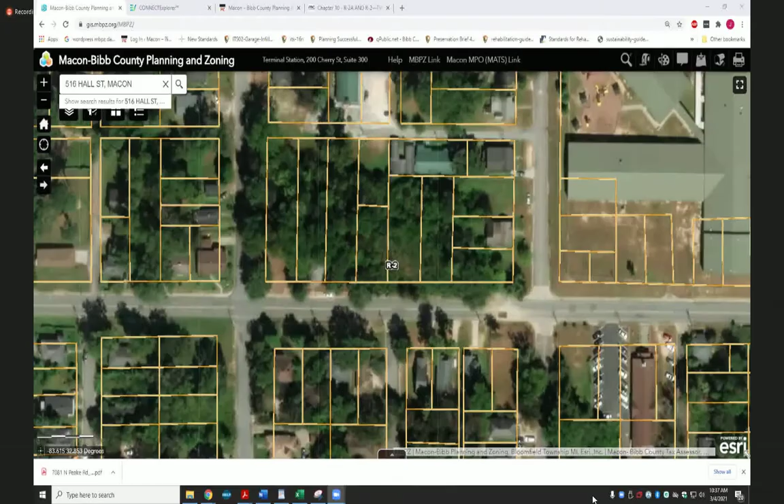What's the address there? This one is at 516, so we've got a couple. We've got 516 Hall Street, we've got 536 Hall Street, and then we're going to be looking at 1136 Bailey, 1180 Bailey, and we're going to look at 825 Woolfolk as well.

So this is the 516 Hall here, and this is the 536 Hall.

From a zoning perspective, duplexes are allowed, provided that the lot area is done. I know we don't have any, I don't think we have any site plans. Give me just a second, let me look here. This is the Sunrise development that we had.

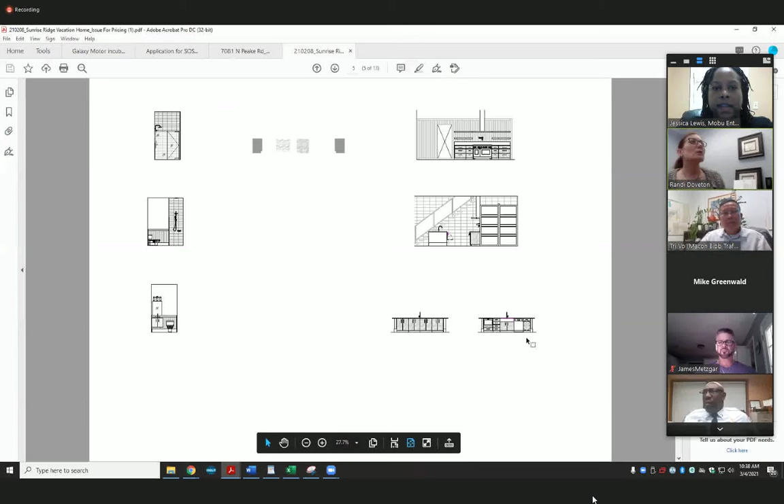Okay, I did not see that one. Give me just a second and let me look for it really quick. I did not see that one when I was doing it. Did it come from info, like the others did? Okay.

Let's see, on the 22nd is this one. Oh, excuse me, yeah, it's the 24th. And then on the description, here we go. I did not, that one got lost in translation. Okay, I'm downloading these and putting them so that we can look at each of them, okay?

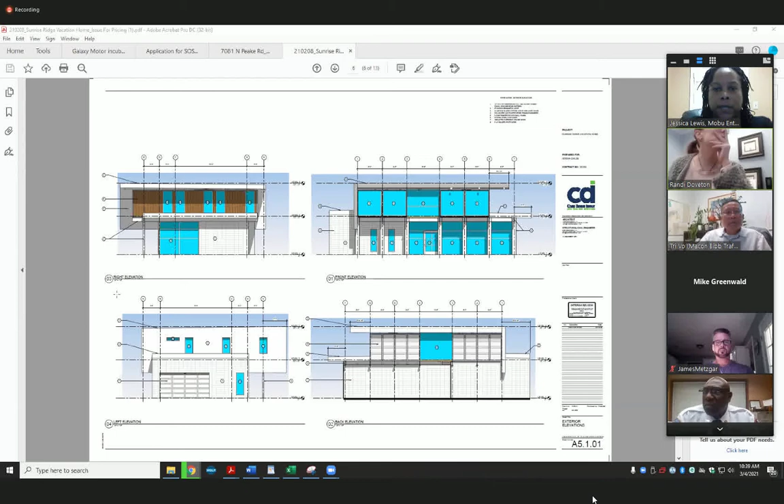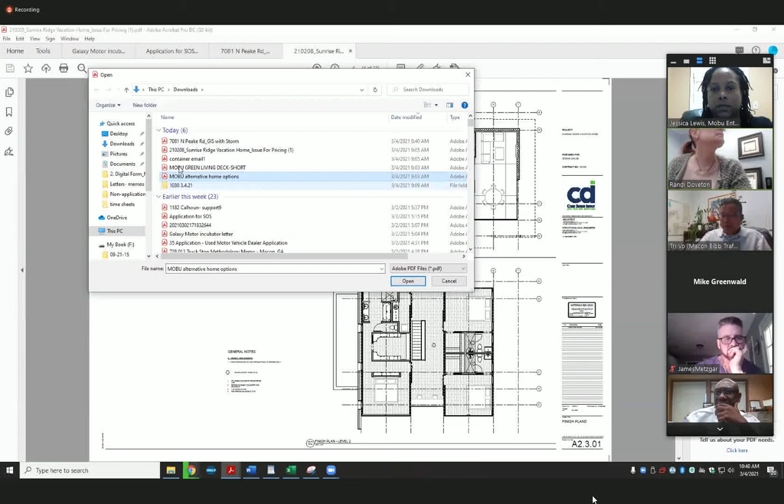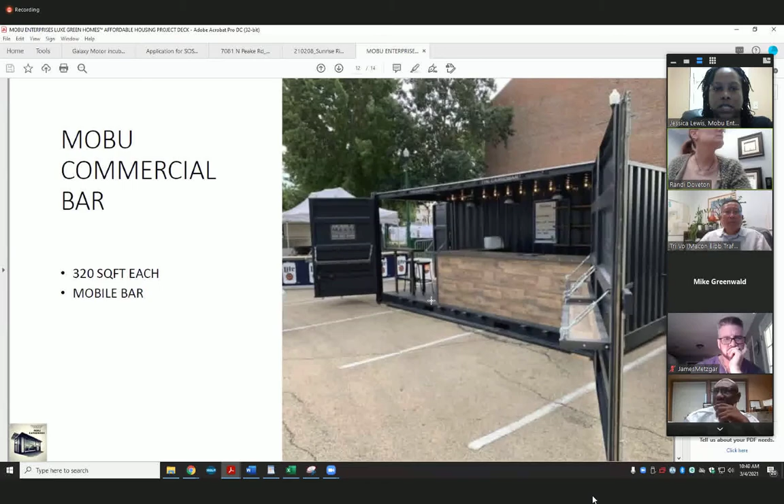It is in the process of downloading. I do apologize for the delay. I said when I was looking at it, you had some really interesting stuff in here. Right, and they're coming up now. It took a minute for them to load for my computer, and I do apologize for that.

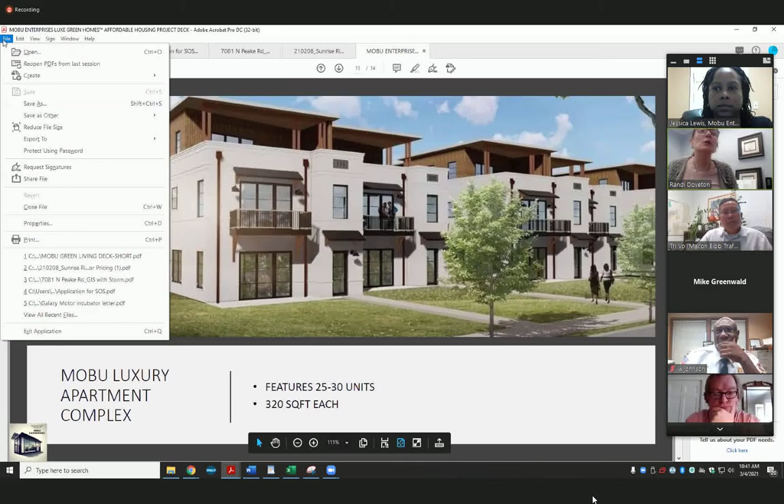I think one of those failed to download for me. I'm trying to download it again. I think the 516 should be up.

Yeah, they're unconfirmed right now. They're in the process. Yeah, I do apologize.

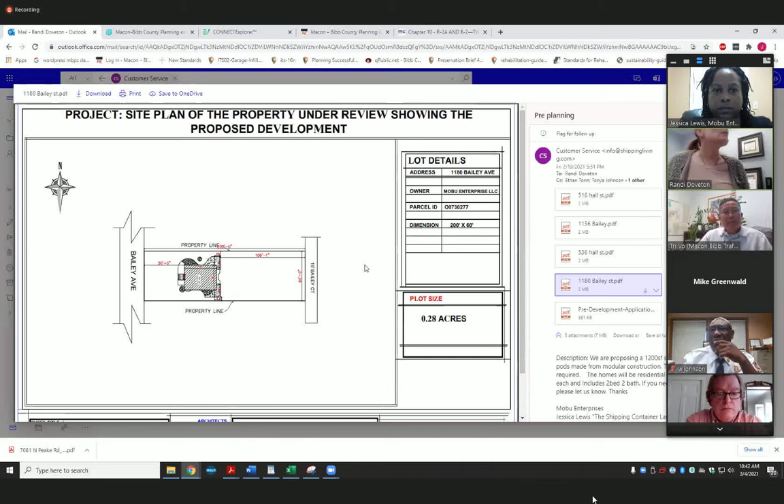Wait, what I could do is drag my email over. We can do it that way. There's more than one way to get around something. So until they finish downloading and I actually open the PDF entirely, you can look at them this way.

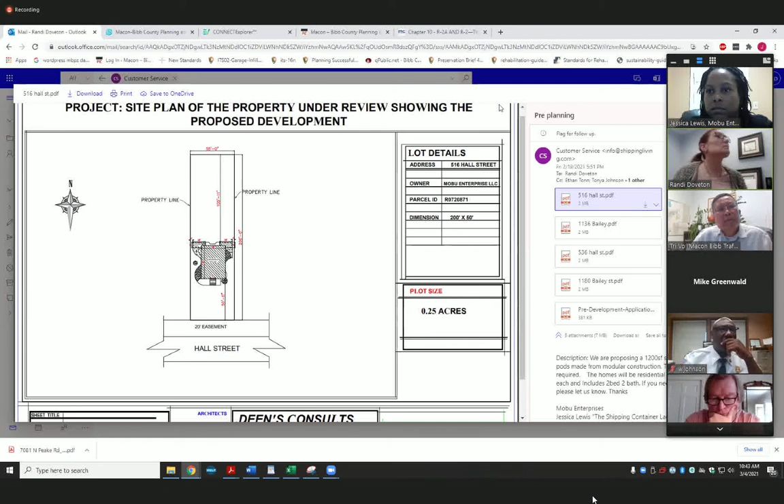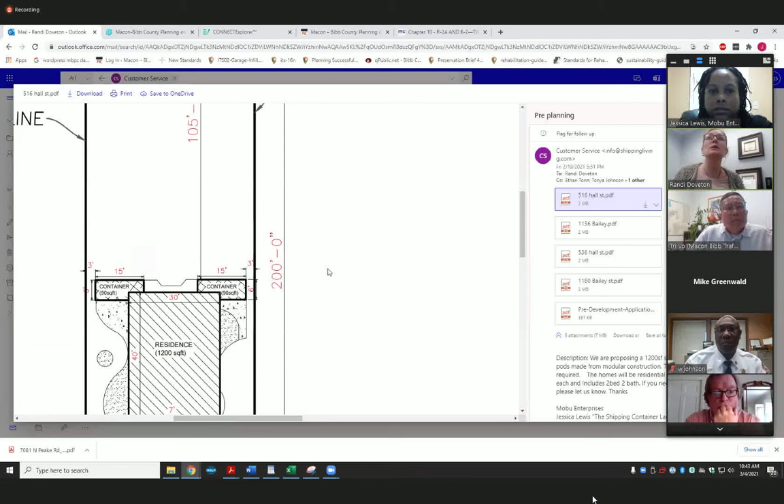Regulations and stuff, yeah, okay. So from a zoning perspective, we'll look at the codes in a few minutes, but we probably need to look at the availability of water and sewer, fire stuff, traffic, as well as the building code department. Algernon, do you want to jump in?

Is he on? I'm here. Okay, you want- sorry, I was unmuting, and so I was frantically trying to look at our GIS map to see what's available.

These are old established neighborhoods, as was mentioned. So there are water and sewer infrastructure available to at least Hall Street, also Bailey Avenue. One of the main issues we're going to run into is trying to find the old sanitary sewer lateral that used to exist, if there normally was an older home that was probably demolished at this point.

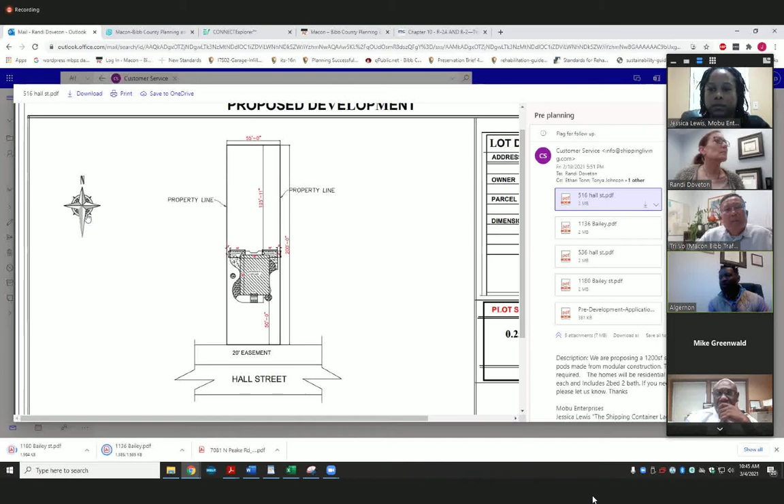Ideally what you would do is we'll try to research and figure out what information we have in terms of the old records of the location of the lateral, maybe the distance from the manhole. That way you can find that lateral on the property and tie back into it. That's to avoid making another sanitary sewer tap connection to the main in the street.

That's just additional cost that you would incur if you have to go into the street, because most of these mains in these old neighborhoods are under the pavement. So you have to employ a licensed plumber to cut into the asphalt and dig down to the sewer main, make the tap connection, which requires an inspection also, and then repatching based on the standards of Bibb County Engineering Department for the right of way.

But hopefully, if we're lucky enough, we can find the old stub outs. They may be buried, but at least we'll do what we can to research our records to see if we can find the distances. At least you'll know where to start digging.

These projects won't incur a sanitary sewer tap fee since they were old established homes previously. You just need to make the connection and pay your contractor or plumber to do what has to be done.

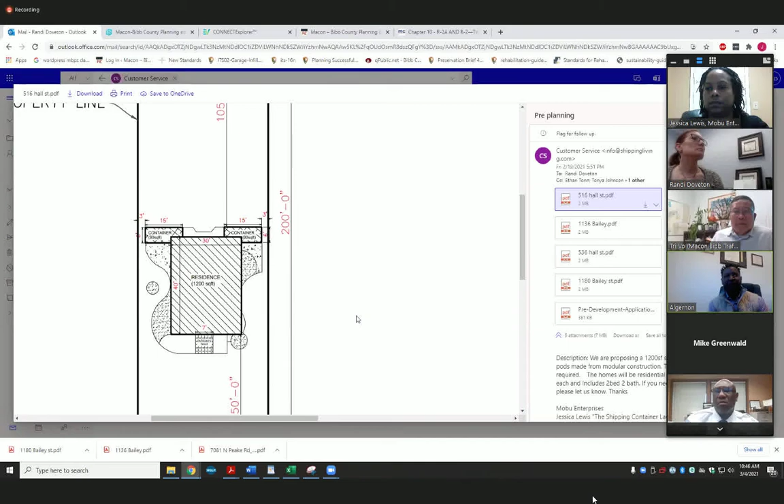We have no requirements in terms of plan review fee. Sounds like with some of the footprints of these smaller lots, you won't add more than 5,000 square feet of impervious - that's the threshold. If you add more than 5,000 square feet of impervious, then you get into managing the stormwater on site, and you have to actually have a plan by a design professional to manage that stormwater.

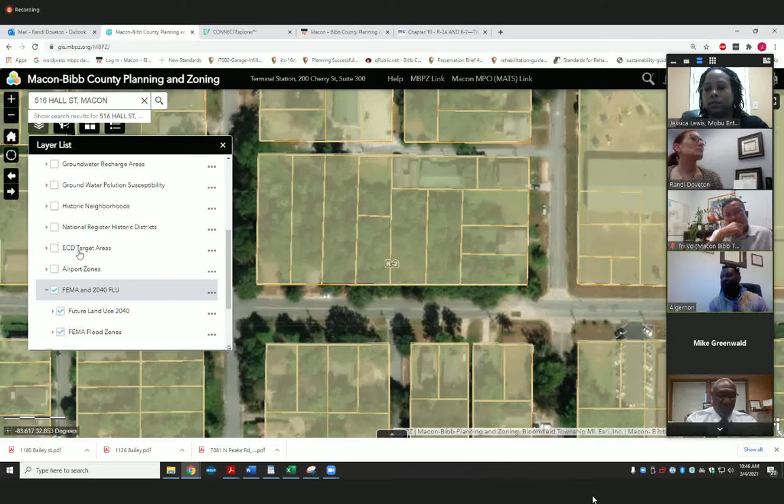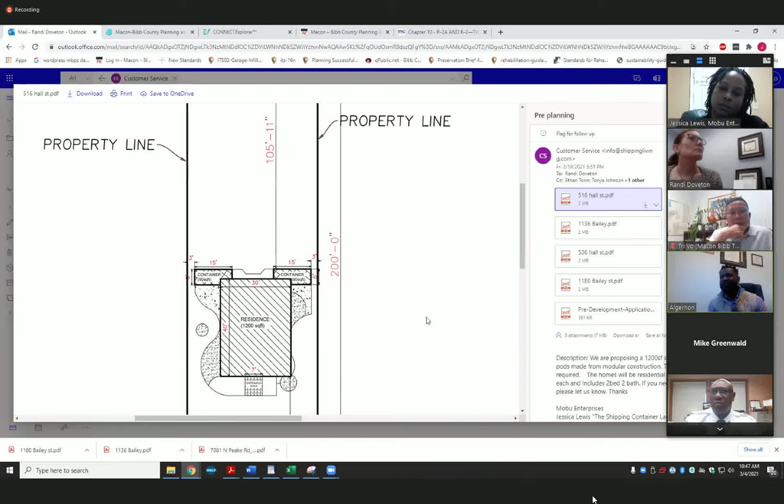And you would just follow best management practices in regards to erosion control. So if there's any land disturbance, which of course is going to be less than an acre, you may just have to have some silt fence or protect some inlets for stormwater, rainwater close to the site. I am showing there are some private storm drain pipes on the backside of the properties.

Probably a good idea to inventory that infrastructure, take a look at the condition of it, because you don't want any drainage problems on your property. You've got a nice new duplex home there, and in the back of the yard it's flooding out because the pipe infrastructure is caved in or what have you.

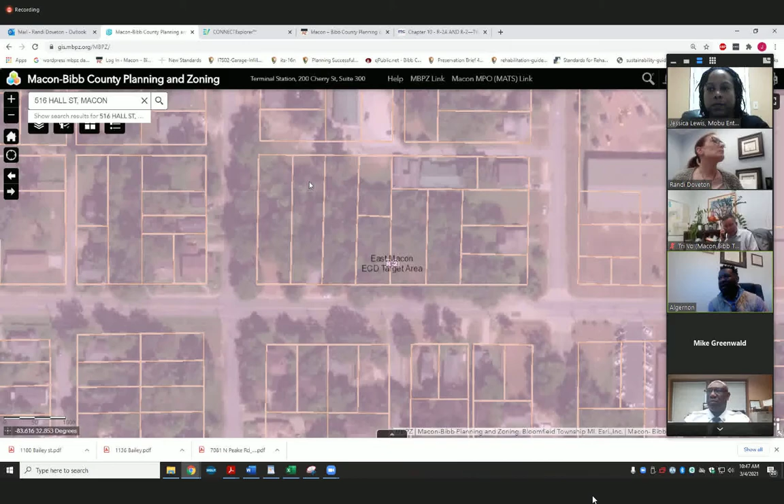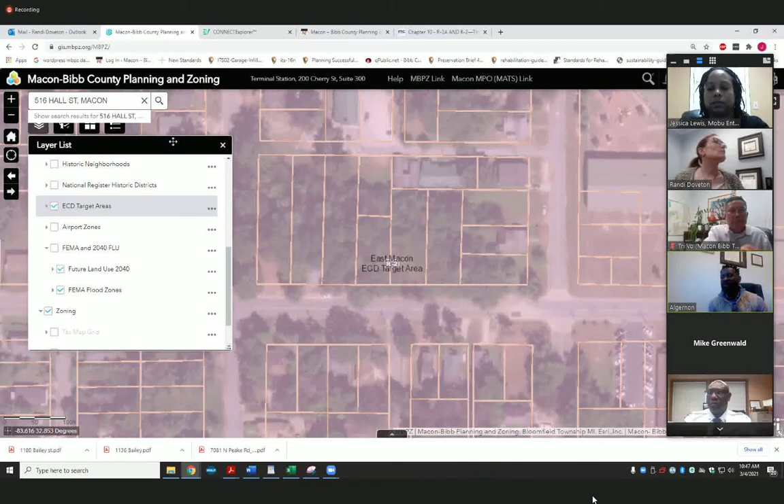That's more than likely private infrastructure. So those pipes are pretty old. Probably need to take a look at them and see if they're properly draining the rainwater off site.

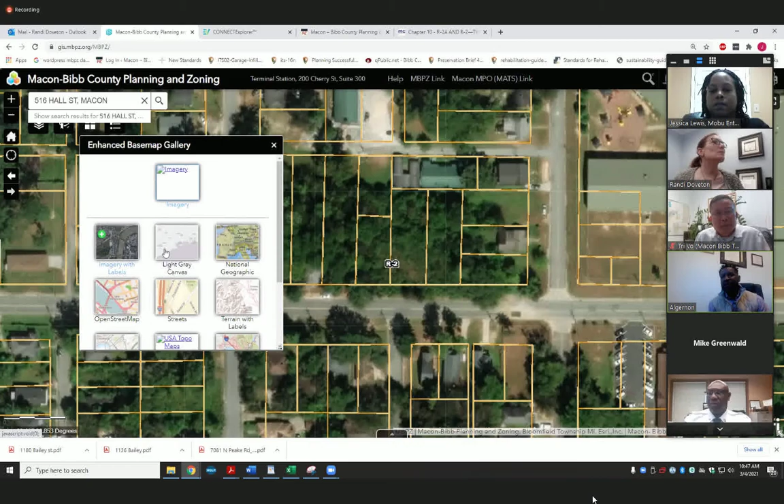So there really isn't much you would have to do with us in terms of the Macon Water Authority.

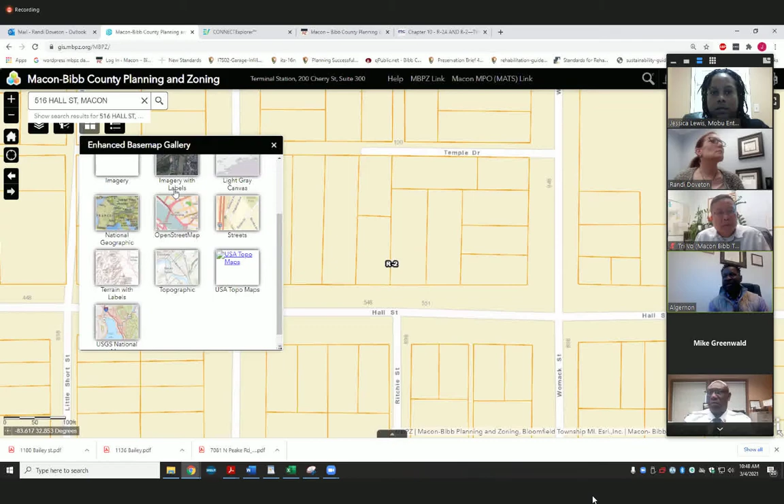A lot of the old water meter services are probably terminated or disconnected at this point. So we just have to take a look at each individual lot and have our water distribution department or meter reading department go out and assess what's required for each location.

Some of the old boxes may have been pulled out, copper service is buried, and we'll have to do a cost estimate specific for each lot to see what's required to restore that meter service and get a new box for that lot. We won't know that until you're ready to move forward and ask for that information.

Then we'll start doing the research in the field to figure out the cost required to restore that service. If we can't find the old service, or it's been totally decommissioned, we'll have to do a new tapping set from the water main.

We do know those standard costs. The 5/8 inch meter is a standard $1,290 for each meter service. For a duplex, if you want them separately metered, that means $1,290 for each meter for both units.

Once you get into larger projects with 3 or more units, that's another threshold. 3 or more units, you're required to comply with our backflow prevention program. Behind those water meters, you have to have a backflow device, a reduced pressure zone (RPZ) backflow device, installed behind the water meter, if that one unit feeds 3 or more altogether.

If you have 3 separate meters, that throws it out of that ball game altogether. But if one water service feeds 3 or more units, then you have to comply with the backflow prevention program, have one installed, and have it tested annually to stay in compliance.

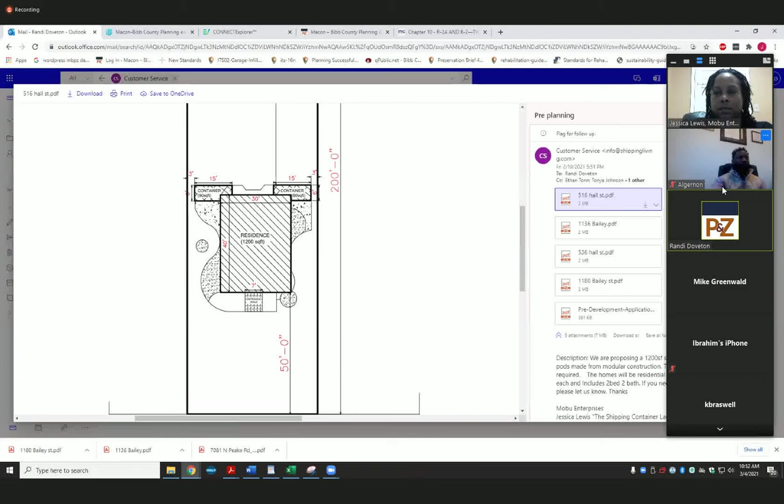Randi, I'll be glad to look into Temple Drive and get back with you later on that and any of those other adjoining properties.

So from a zoning perspective, Hall Street's going to be a little bit - 516 Hall is going to be a little bit more complicated than some of the others probably.

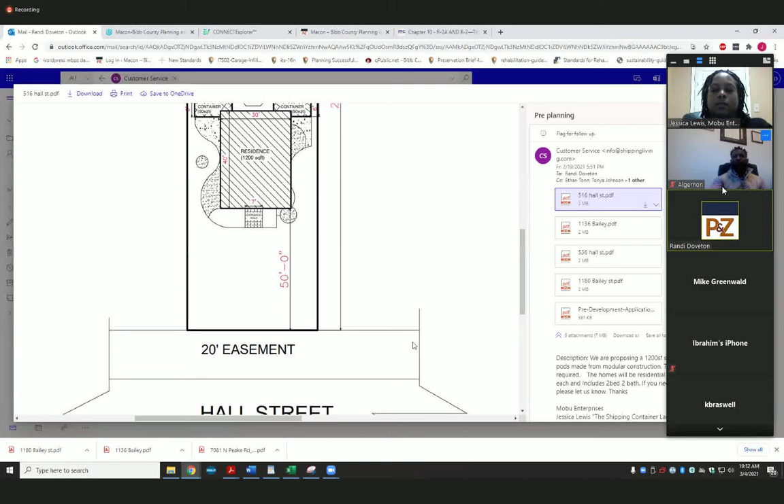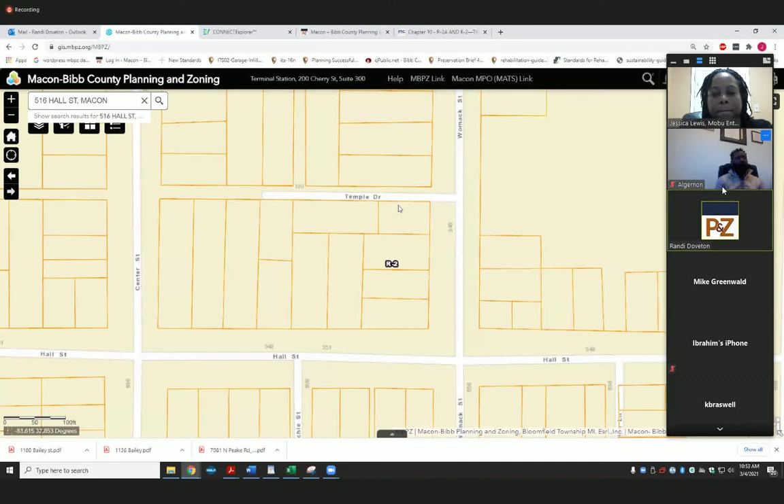This property line is also a right-of-way line. This is the right-of-way to that little alley street to the rear, and then you've got a right-of-way here. Let me get over to the map. So you're looking at Center Street here - this is 516. You're looking at Center Street, Hall Street, and then even though it may not go all the way down, you've got a right-of-way for Temple Drive back there.

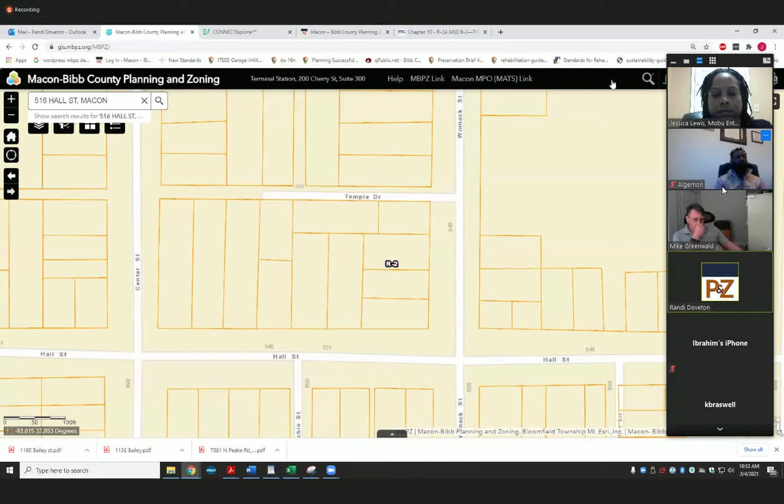From a zoning perspective - screen here, just a sec, trying to relocate my little bar there so I don't...

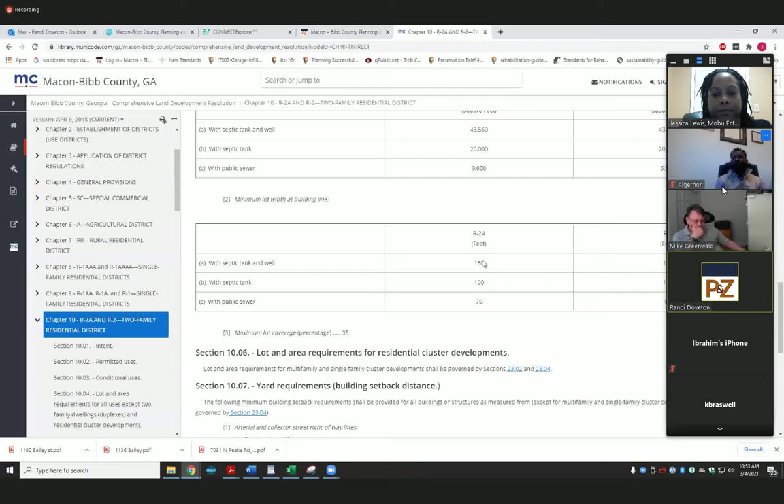There we go. So in an R2 district, you're going to be looking at some setback issues, not from the front, not from the rear, but from your sides. That left side of 516 is a minor right-of-way for Center Street, and it should be 25 feet.

These are such small lots, there's no way to get 25 feet there and actually stick something in. And on the other side, you should have 10 feet. So you're showing 3 feet and 3 feet.

This one, from a zoning perspective, doesn't cause me that much heartburn. This one maybe does - I'm going to defer to Jim on some things with that.

But you're also going to have, because of this, the distance to the street, you're going to have some stuff with building codes that James Metzger will jump in on. But from a zoning perspective, this is in the East Macon ECD target area, and that does give us some greater leniency on certain things.

Based on, these are existing lots of record. They're smaller, anything that goes on them is going to require variances. They would be able to, provided they meet things, other stuff in the neighborhood or historically, we can grant, we can be more lenient on setbacks and other things than we can on lots that might be legal lots of record, but are not in the target areas.

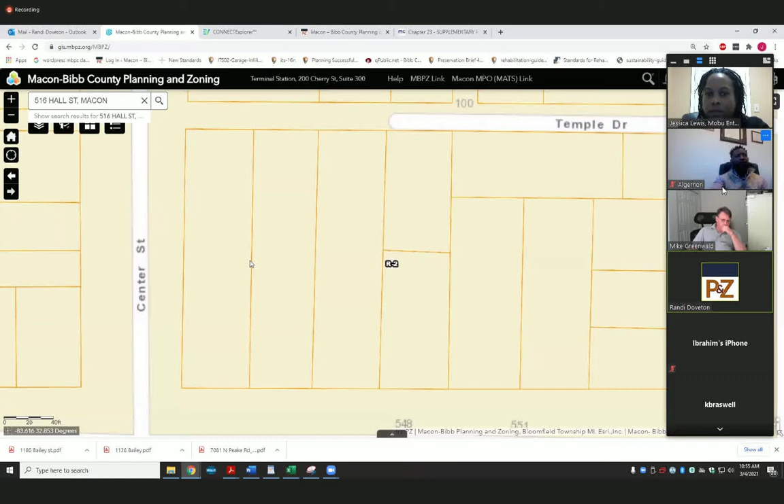Oh, okay. So they're not the actual houses. Okay. So are they connected to the house, or are they more of an accessory like a greenhouse?

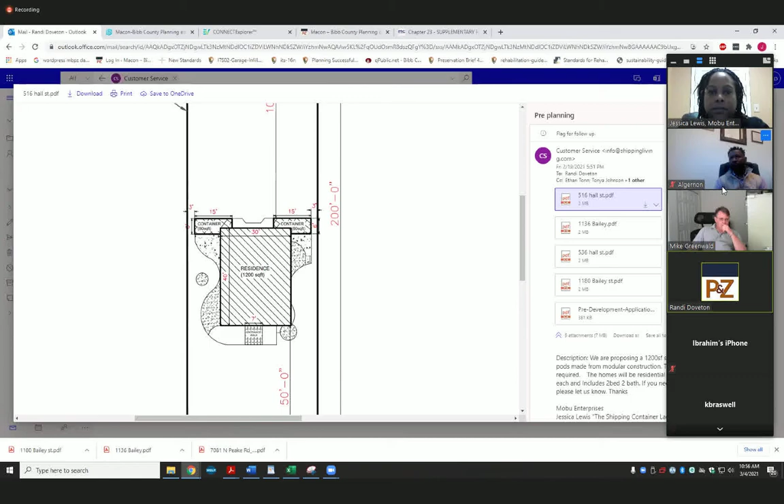Yes, from a zoning perspective, we would consider those accessories. They do need to be 20 feet from the house and 5 feet from a property line, but you could put them somewhere else on the lot too.

Do it as a community garden type.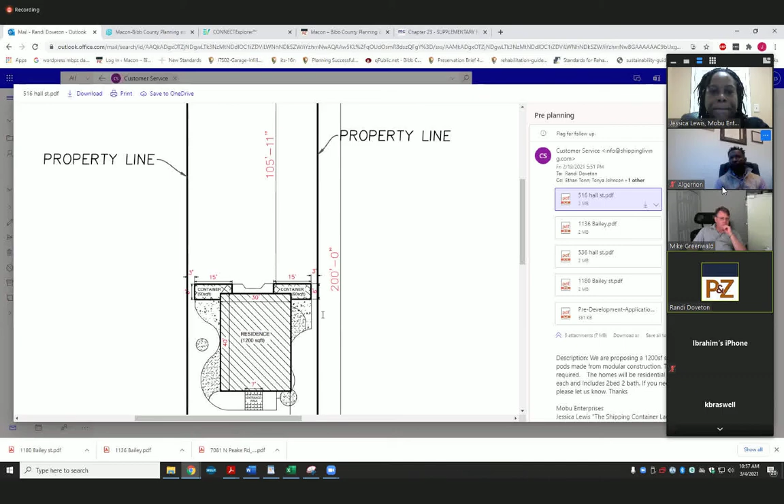Okay. Okay. Okay, so I wasn't sure. I thought maybe they might be some type of part of the house. I was not sure exactly. I saw they said container, but I was not sure exactly what they were.

So in that case, you probably more than meet the 5 feet here then, and probably pretty close to the 25, because if this is 15, maybe 3 to there, you're probably getting close to 15 to 20 total between here and there. We're looking at, what's that? There's a total of 15, but it's inset sum. You've got 3, so just say 12. You're at least 15 feet, it looks like, from Center Street there.

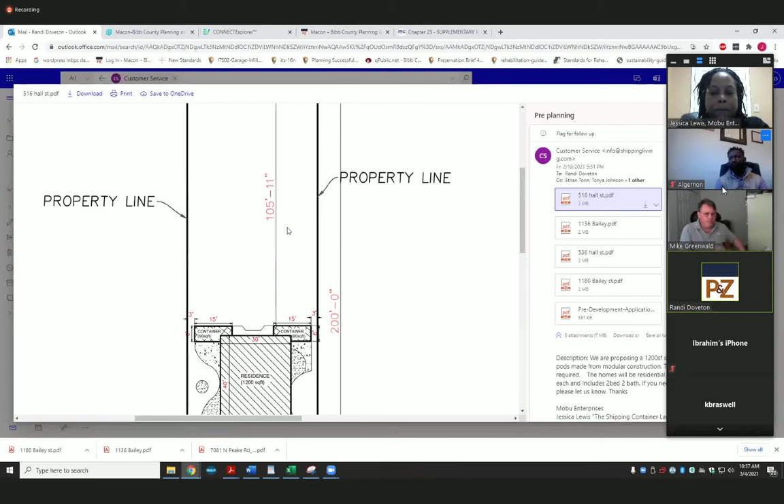So from a zoning perspective, that shouldn't be a problem. It's a permitted use. It's an R2, and we just issue a zoning permit. It's $375 per location. You submit the application, the site plan similar to this, and we issue the zoning permit.

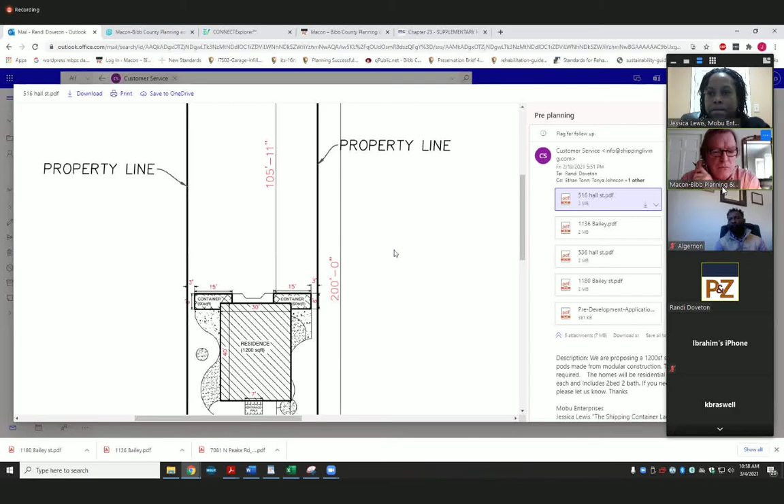Randi, can I ask? I'm confused, surprise. The structure, the residence you're showing here, what type of construction will that be? Is this a modular home? Is it a container, a shipping container that's been reconfigured, or what?

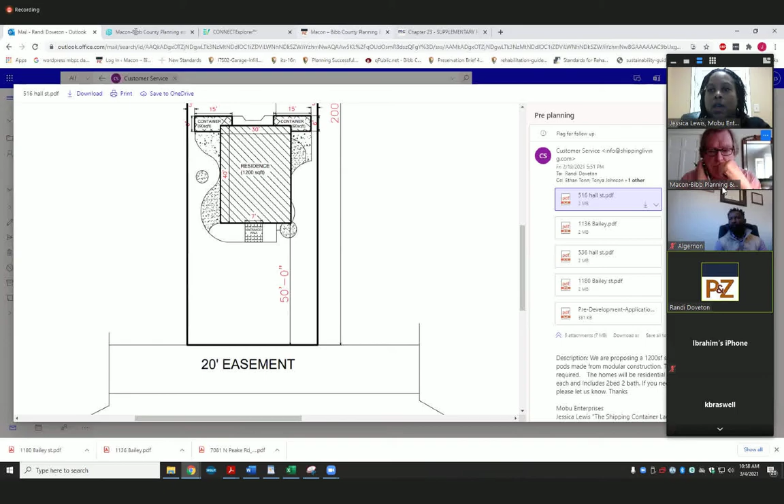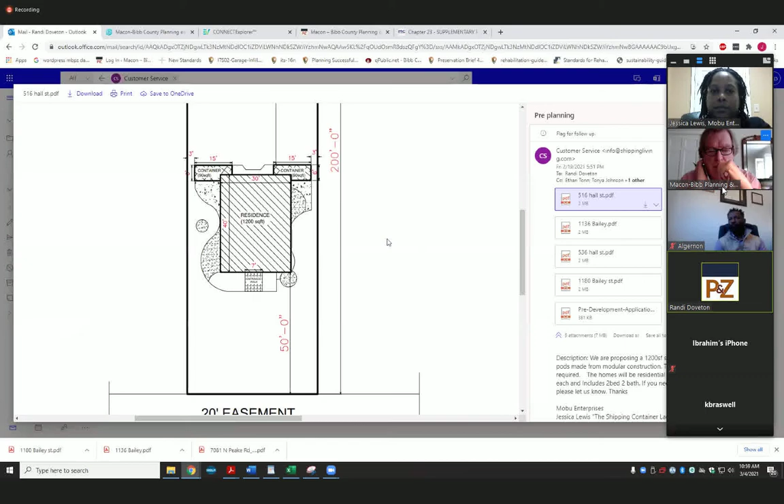Okay. So essentially, it is a modular home, and that it's being built somewhere else and then brought in place with minor stuff done. Okay, so how does the DCA classify this?

So they, okay, they would consider it to be an industrialized home at this point, facility. So that then gets to the point of how the building code department is also going to classify it.

Yeah, let me ask, is that Ms. Lewis? Will that be installed on a permanent site-built foundation? Okay. Okay.

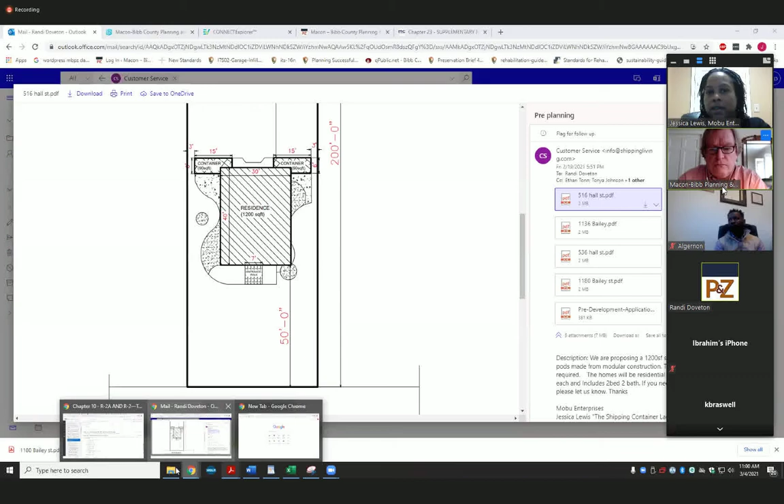Okay, so do we have, Randi, do we have a visual of that unit? I don't know that we have one of that particular unit. I think they were seeking some guidance from us on what type of facade skin they would need to house them in, because they have several different.

Hold on just a minute. Well, quite frankly, we're in kind of uncharted territory here from a zoning standpoint. So it's, this is also one, they can put any type of facade on it and wrap it.

Okay, so I mean, which of these we're seeing would be that unit we were just looking at on Hall Street? I'm thinking probably.

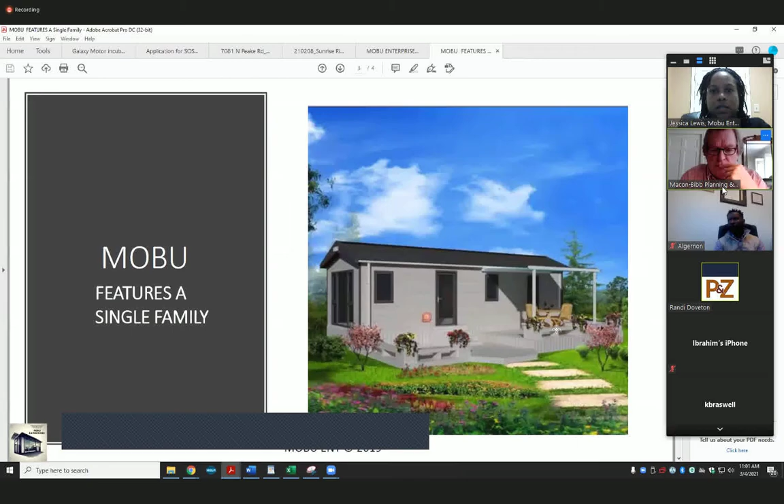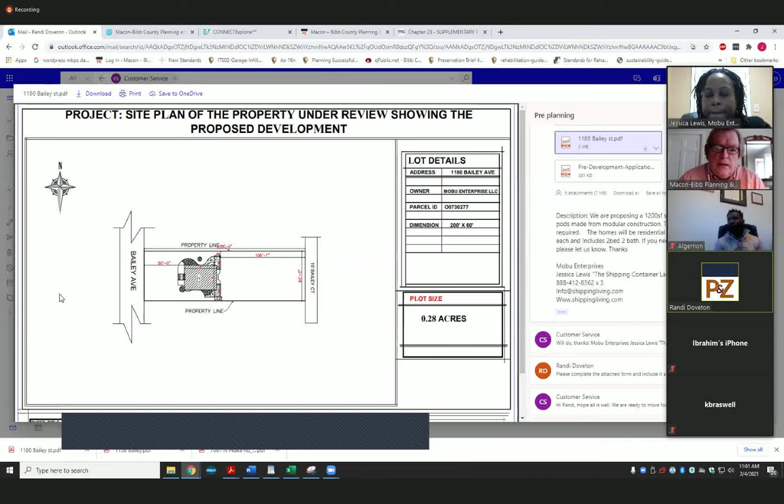I don't think any of these sites are in a historic zoning district, so there's less concern about the exterior appearance from a regulatory standpoint. Of course, a commission would want it to fit in with the existing areas as best it can.

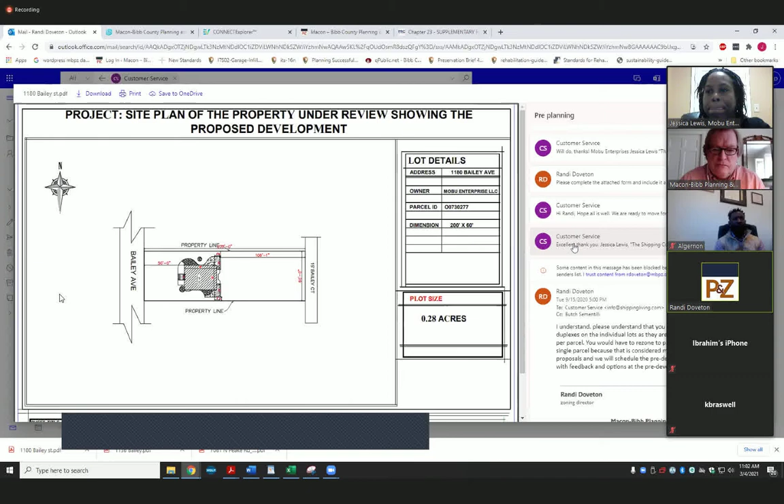But the more important issue is how that structure is classified. If it's classified as a manufactured home, then that's a problem. I was considering that they were going to be assembled on site, or that it was already classified as an industrialized dwelling, because from a zoning perspective, if it's built on site, then it's not a manufactured home.

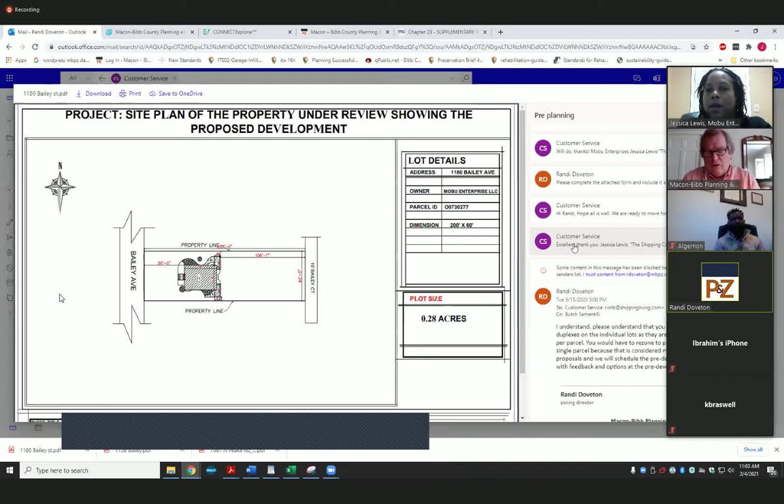Or if it's industrialized, even though it's built in a factory, it's a DCA industrialized house, we treat those no differently than we do a site-built home. We definitely need to hear from Jim Metzgar, but it's going to be kind of critical how DCA classifies this type of structure.

Okay, so there we go.

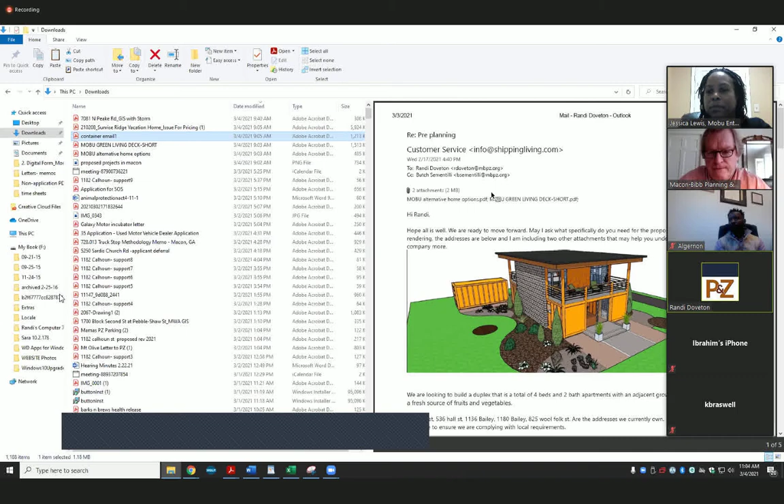I'm not sure that it's built on site, it's really about what building codes apply or don't apply. Even if you're built on site, the local building codes have to apply. So that's something Jim will have to address.

If you get a DCA certification, then it's like an industrialized building that's built off site and brought to the site, then that's fine too from a zoning standpoint. But what I'm hearing you say is that this is in the works and you won't know for a while how they're going to handle these. Is that correct? Okay, Jim Metzgar, are you there?

Yes, hi, my name is Jim Metzgar. I'm the plans examiner here at Macon, Bibb County.

So modulars are fine. Normally when they're at the plant, they get inspected at the plant in accordance with whatever year and edition it is. That certificate will come with that modular unit. Once it's brought on site and set, we will do all the inspections for the connections, the sewer, the electrical, the plumbing.

What if they're not building it in a plant? What if they're planning to build it on site? How would you treat it and inspect it at that point, Jim? Well, then it would just be a set of plans that would be submitted to the office, and we would do the regular inspections for any single family dwelling or duplex like we normally do.

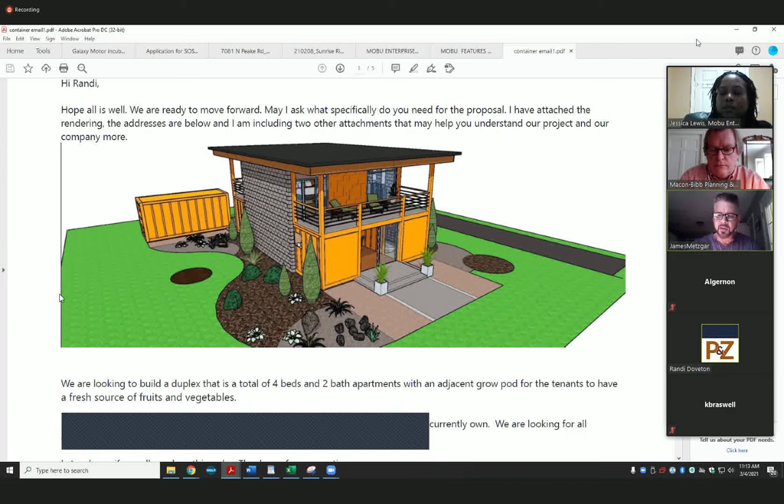The other thing we do here is you can always schedule a pre-submittal meeting with the building and fire department. We hold these on Tuesdays and Thursdays. You could email us or call, and right before you're ready to submit, we can iron some things out and take a look at your preliminary plan. It's great to have these meetings, we iron out a lot of issues prior to submission so the review process is a lot smoother.

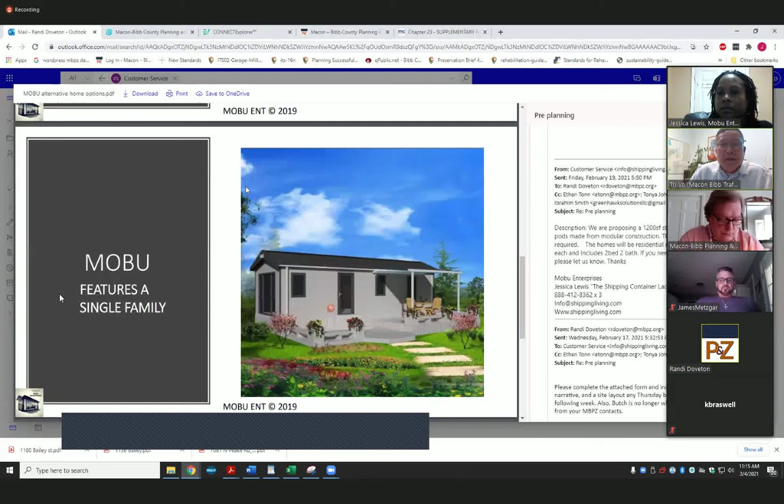Yeah, I'll jump in. This is Tri Vo with Macon Bibb Traffic Engineering. On one of the site plans, it doesn't show any driveway or so on. Each property requires adequate off-street parking, so make sure you put that in mind. Back on the site plan, it's showing that I don't see any driveway or garage on three lots.

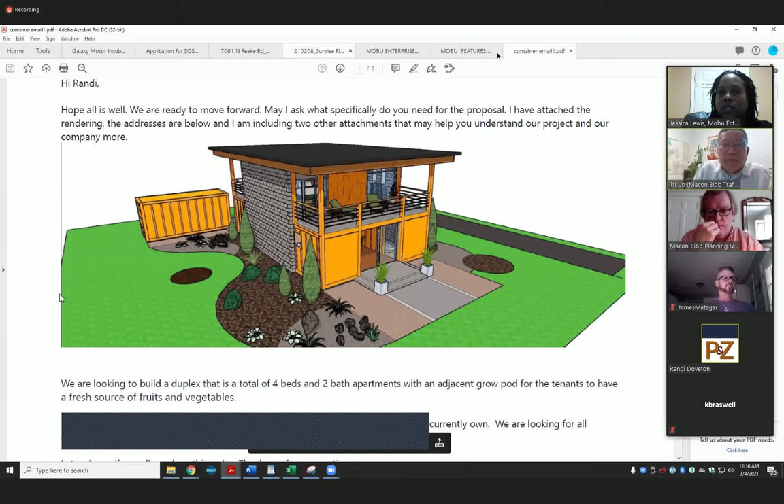That's something that the zoning handles. I don't think so, I mean every single family or duplex that we do has got to have room for basically two parking spaces, so you won't have to get special approval from traffic engineering for that, but that's something we would require just by code. That's all I have.

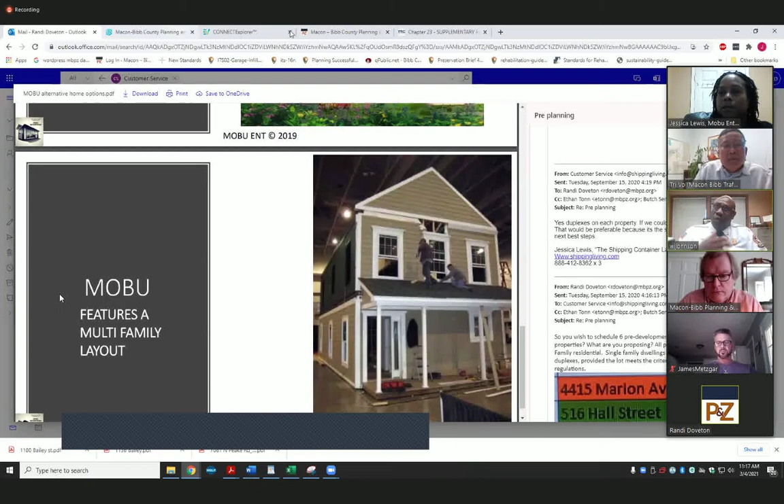Okay, Willie. From a fire side, for most single family dwellings we don't normally get involved, but since these are going to be containers, you're going to wind up dressing it up and putting other kinds of coverings over it. For us, we just need to make sure we know when y'all do them and what you've got, because our firefighter operation will be different now. It's not wood frame behind there, you've got a metal building behind whatever you have on the front. So for us, we just need notification and documentation of exactly what you have, and we'll probably come on site to see each one as you do them.

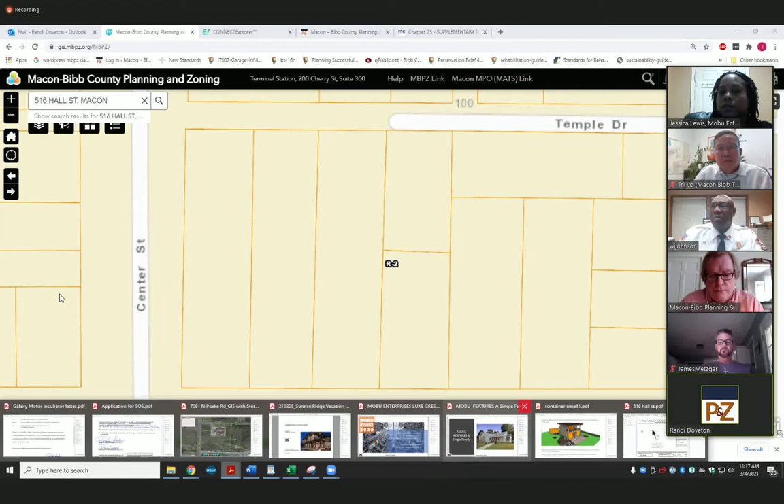And looking at these, I had originally thought they were only going to have 3 feet, but just to be safe, what are you guys going to require for setbacks from your interior property lines? Not from the zoning code, but from a building code, what are you looking at? Their fire separation distance from the property line is just going to be based off the table. If it's within that 5 feet, then they will need a 1 hour rating, but it'll just be based off that table, whatever their fire separation distance will be.

Okay, I'm going to pull up the one for 536. I think I'm going to have to do that from my email. Give me just a moment.

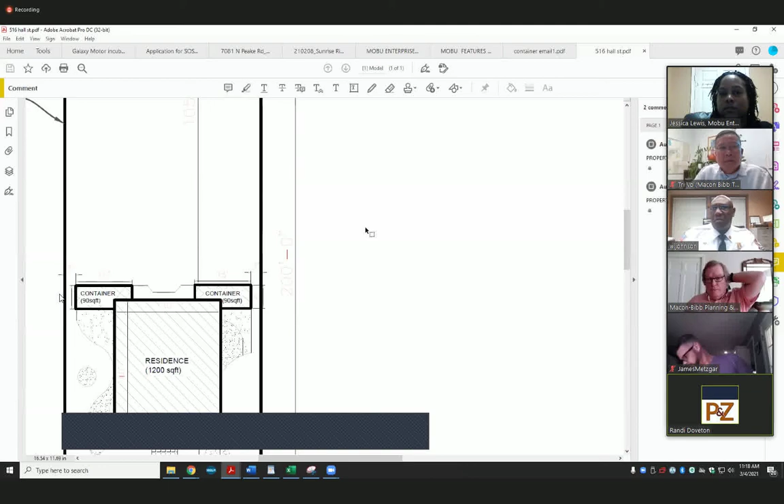Hey Randi, this is Keith again. While you're pulling that up, I've been doing some research. The street you referred to as Temple Drive, it's a 20-foot private alley.

Let's see, I've got to get back to the right. I've got so many windows open I'm not sure which one's which, guys. Give me just a second here. And you did say that we were your first ones here in Macon. We're the first ones with this project. Enjoy. Wow.

Okay. Okay. Okay. Okay.

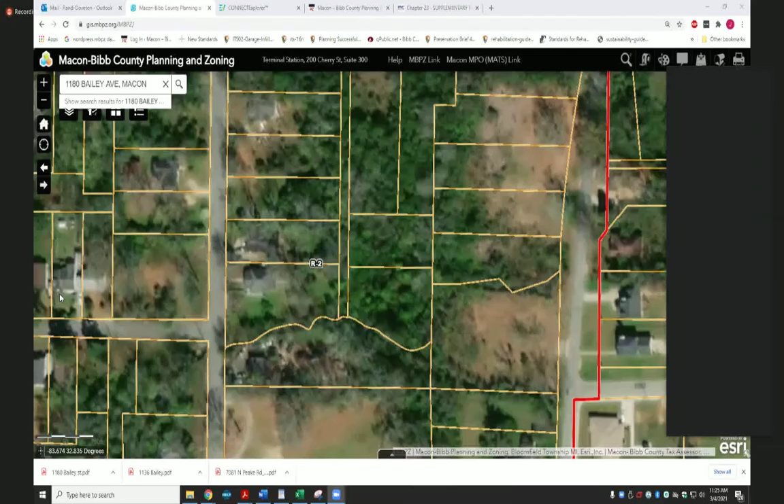Okay, so this is 1180 Bailey here. And I didn't see anything here that really caused any heartburn, other than, again, the containers, they can go, they just need to be at least 20 feet from the house and 5 feet from a property line. But it looks like other than that, you meet all the setbacks.

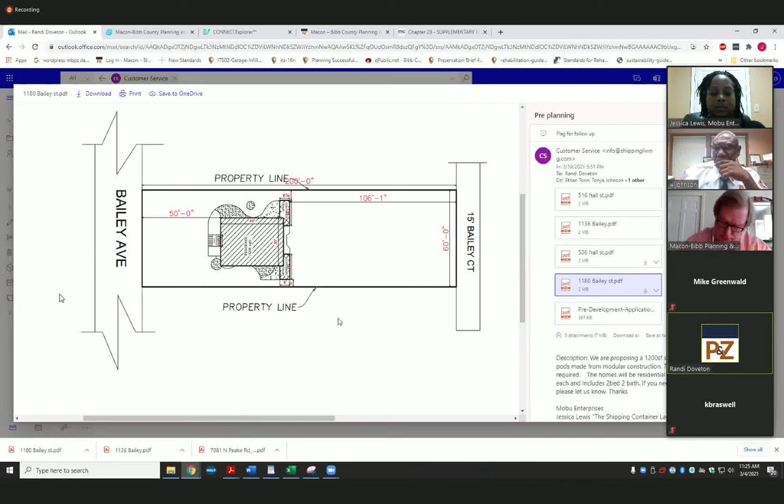Algernon, is there water and sewer to Bailey, to these lots, do you know? Yes, public water and sanitary sewer access for all properties. Okay, let's see, I'm going to look at, we need to look at 825 Woolfolk.

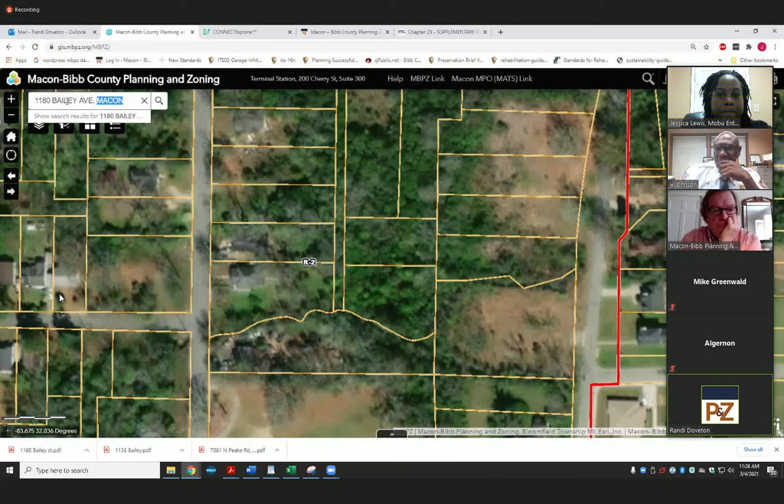Let me ask you a question - what's the difference between this type of project and those tiny home projects?

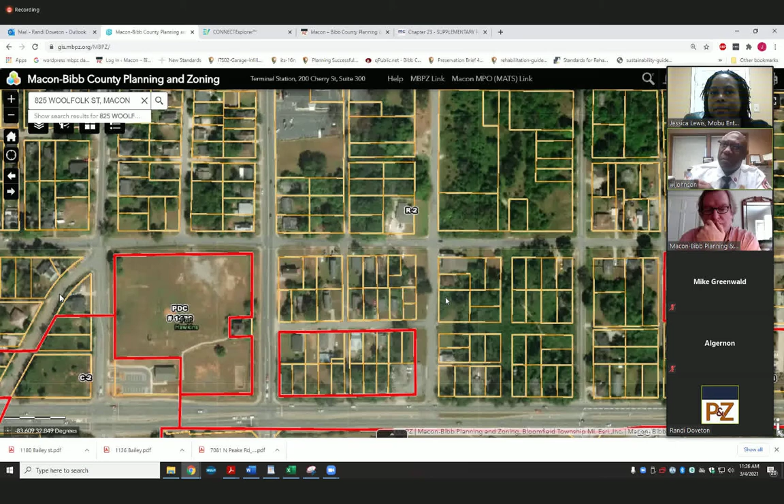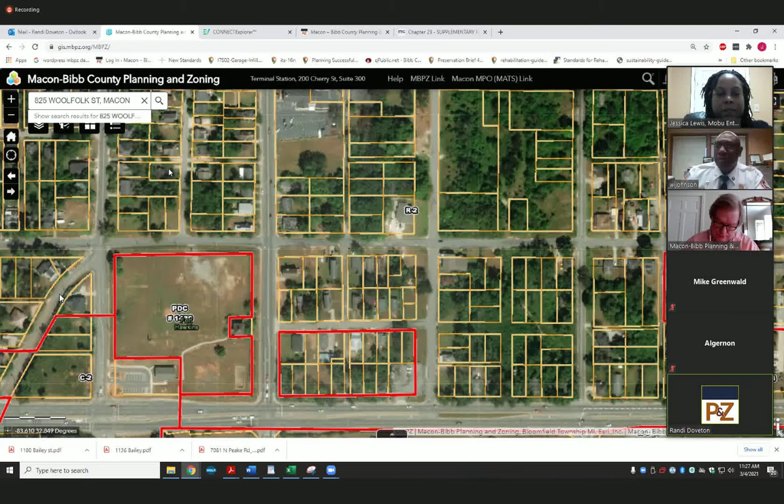From a zoning perspective, she's putting one duplex per parcel, unlike what River Edge did, where they actually rezoned it so they could put multiple tiny homes together. That was the difference with them. So let's look at the site.

So now we're going to look at 1136 Bailey. Okay, give me just a second and let me get back to... let's see, yeah, this is Woolfolk, and it's really fun.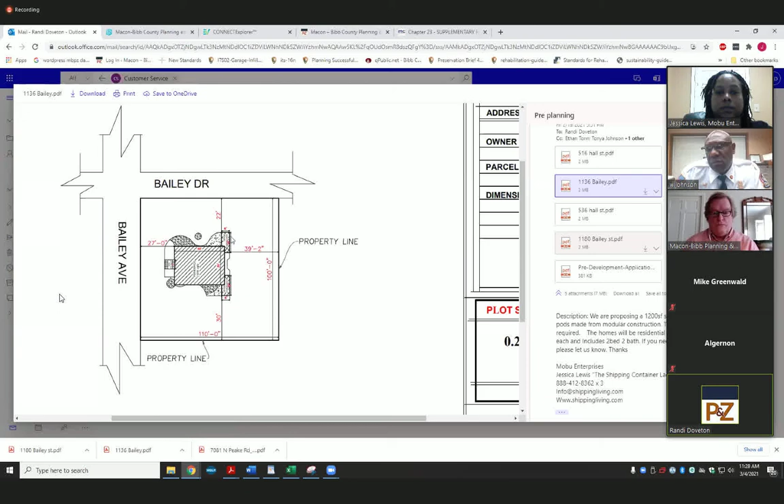Same thing with your containers - they just can't go between the house and the street and need to be at least 20 feet from the house, or it requires some variances. But from a zoning perspective, I think they're pretty straightforward once we know how the building code department would view them.

So it depends - if during the process you do one on the site, and then get your certification stuff with DCA ironed out before you move to the others, we'd still treat it the same from a zoning perspective. I just need a copy of the certificate. It wouldn't be any different for us.

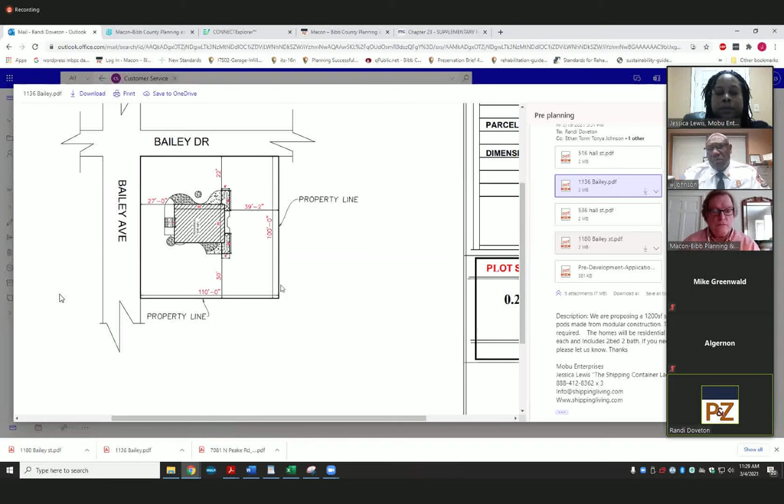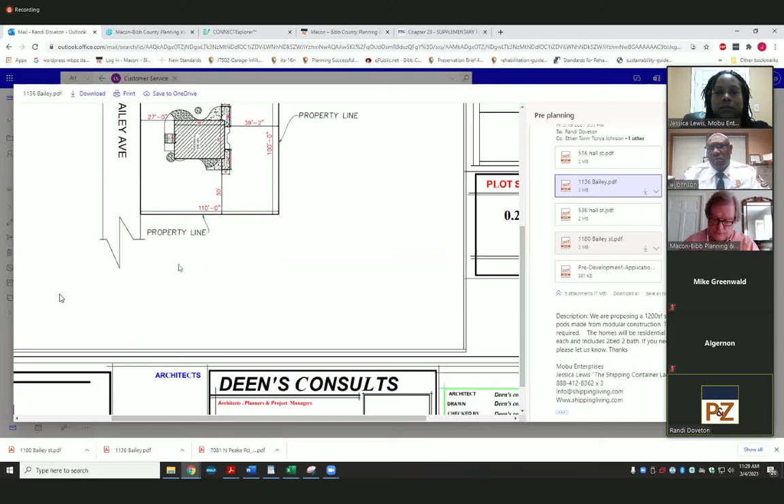The problem we would have is if they had considered them to be manufactured housing versus industrialized or site built, then it would cause us some heartburn, because you can't put a manufacturer there. They're not temporary, they're not on a chassis that's going to be hooked up and pulled off. So I think they're pretty straightforward from a zoning perspective, now that we know how building code will classify them.

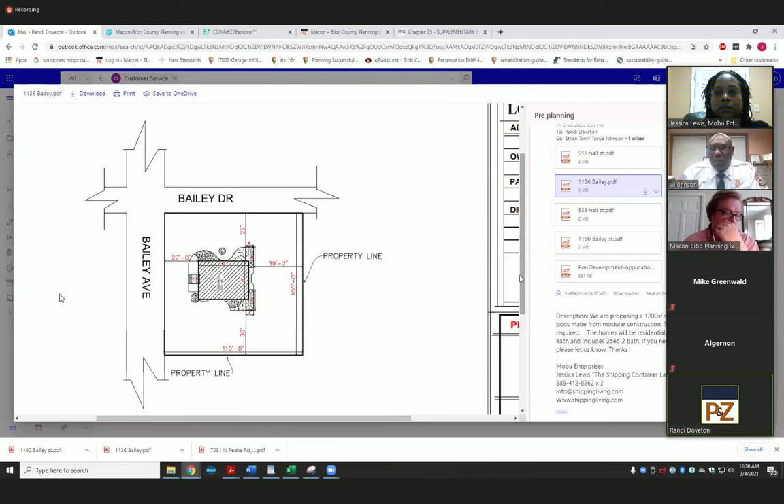Anybody else have any comments, questions? I do have a question for you - I noticed on your website that you had the containers versus steel or something of that nature, and I was just curious about the differences in them, just personal curiosity.

And I was trying to remember where I came to from - this was the smart steel. This is what made me wonder what the difference was.

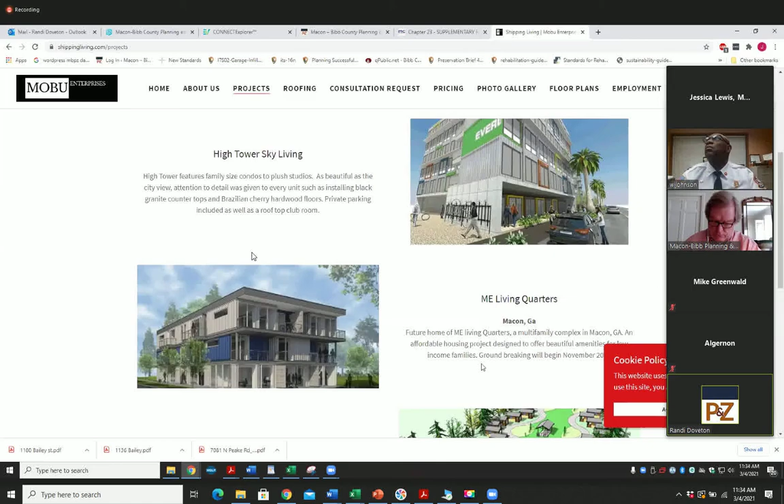Yeah, your renderings and stuff were all very cool, I enjoyed those - but that was my question. When I'm looking at it, I was curious of the difference between the container and the smart steel. So that's a very cool alternative.

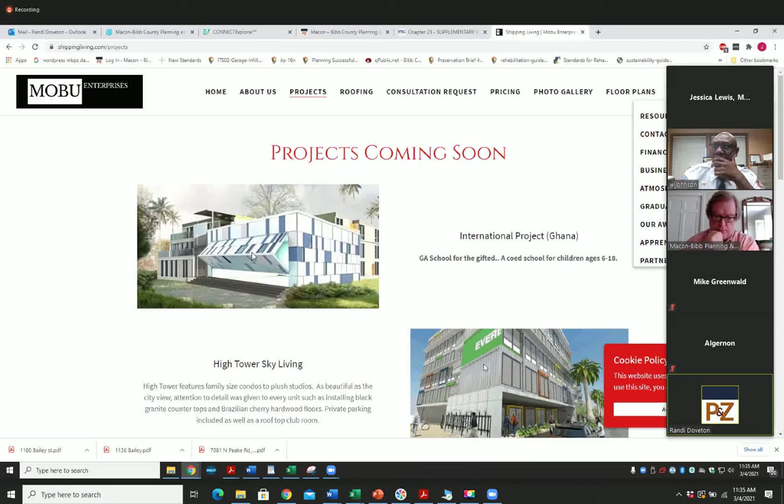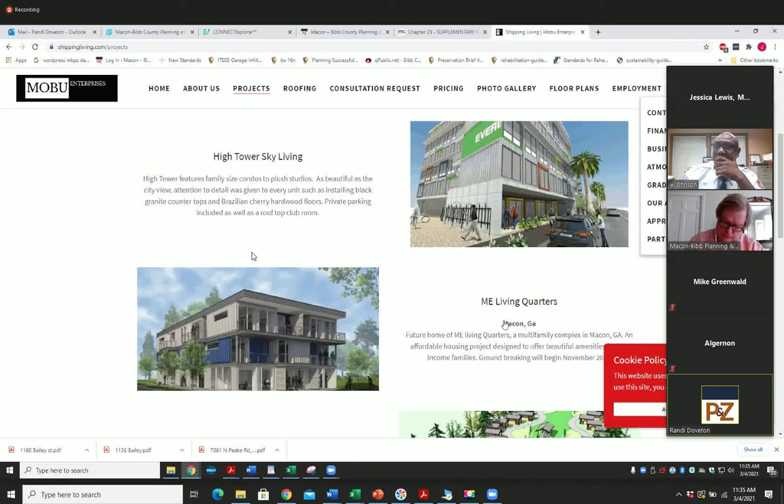Yeah. Oh, cool. Anyone else? Keith? Anyone? Jim? I'm good. Okay, we're fine. Do y'all have any questions for any of us?